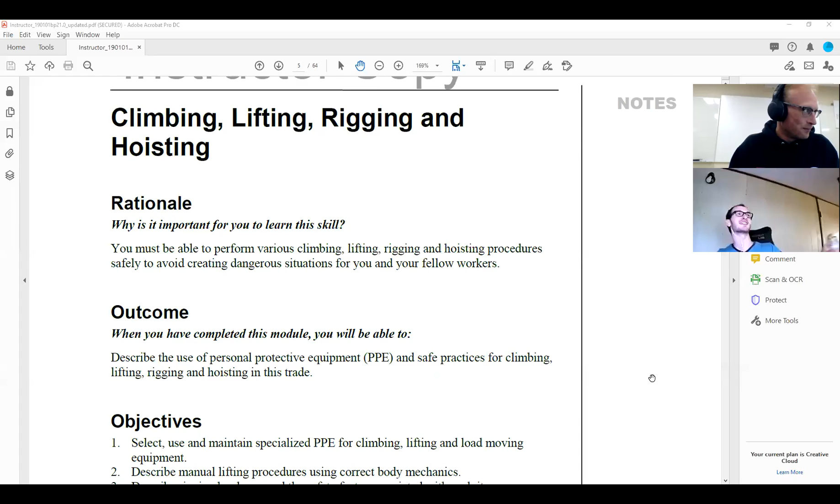At our shop where I work, we don't even have to wear masks at all. We did, however, lock the shop up from all drivers and whatnot getting in. Oh man, every shop should be like that anyway, as far as I'm concerned. Most of the time they're just a distraction to what's going on. So yeah, they just stand around for 45 minutes talking.

Yeah, exactly. So why do we need to know this? Because for some of you, you're going to be doing climbing. Most of you will be doing lifting and rigging and hoisting procedures. So some of you will be climbing wearing fall protection, but I guarantee almost all of you will be using a crane at some point, and I can promise you you'll all be lifting something at one point in the future. So how are we going to learn this?

Well, our 5 objectives in this ILM: select, use, and maintain, just like what we talked about in the last one, specialized PPE for climbing, lifting, and load moving equipment. So what are the different types of PPE we can use for that? Manual lifting procedures, so something that's often overlooked. We need to make sure that all of you are lifting properly, because I don't want any of you to have a sore back, that's no fun at all. For any of you who do have back injuries, it's not a fun time.

Describe rigging hardware and the safety factor associated with each item. So this is going to be when you start loading up, and especially this next one too, select correct equipment for rigging typical loads. If you're picking up small little parts around the shop usually it's not crucial, but once you start picking up these larger, really heavy, awkward loads, you need to be really, really sure that you're picking the correct load handling equipment.

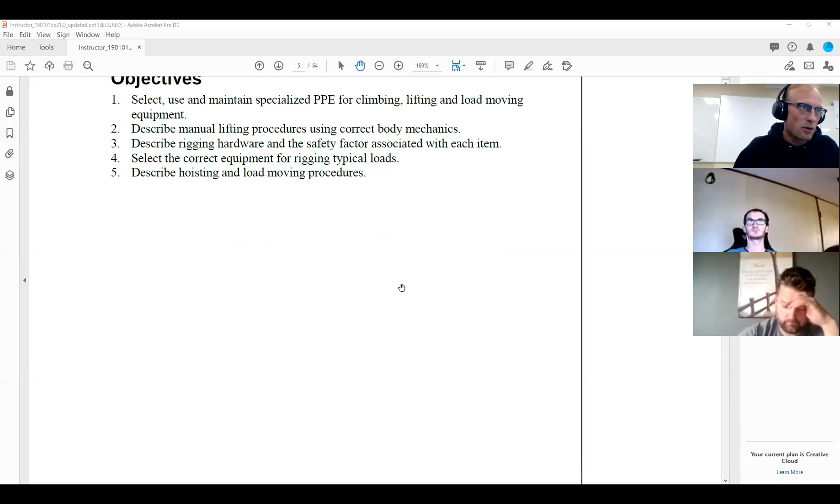We're going to talk about some crane sign language for those of you who have never used any of that. Sometimes places get loud and you're wearing hearing protection, so you can't hear everybody talking. You're not going to be able to see who's yelling now because we're all going to be wearing masks. So the sign language involved with cranes is going to be very important.

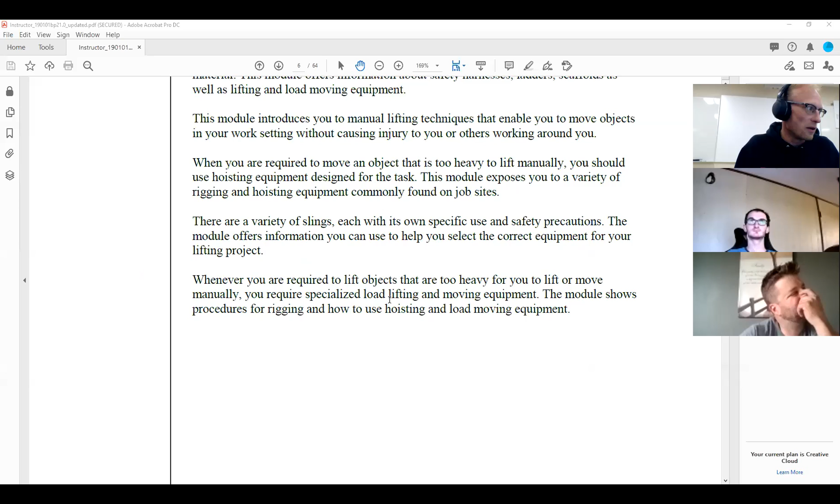What is the PPE we're going to require for climbing? Well, a harness, just like that one. Just like the one I have here. Just like something like this.

Wait, is my camera on? Can you guys see me? Okay, good. Yeah, you're good.

Just like this. This is the nub that hooks onto your back, so this is where your safety will be. This is going to go around your front area here. I'm not going to show you how to put this on. They give you some nice fancy directions in the ILMs there, but unless you're using this kind of stuff, it's not really necessary. That is something you'd certainly take a specialized training course for when it comes to PPE required for fall protection. They're going to tell you not only how to select the proper harness, the one that has the correct safety standards and fulfills all of those, but also how to inspect it and maintain it.

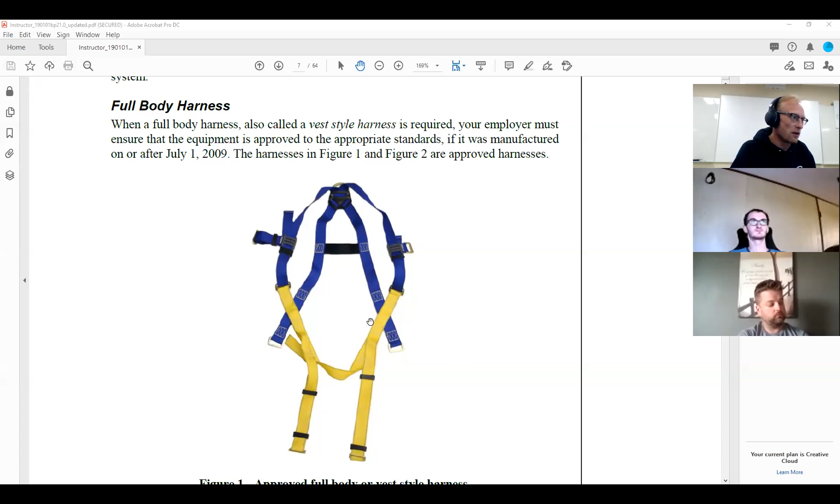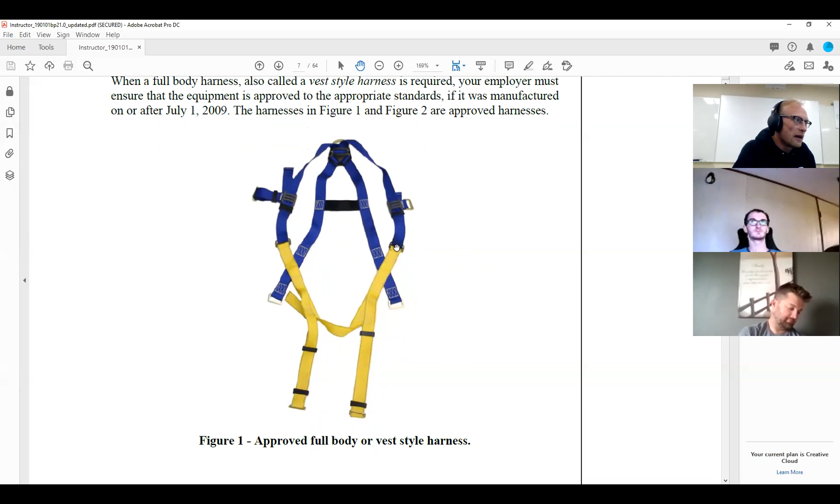Remember I said there's going to be some times where you definitely have to throw this out. For instance, if you don't have your own harness, if they're hanging along a wall and maybe they only get used once or twice a week, you need to inspect it every time you use it. But maybe throughout the week everybody wheels by here with a pallet of parts and they're rubbing along here, so now there's some wear happening in this area. Then you would need to be trained properly to know when to discard it and get a new one.

A couple different parts of the body harness: a front D-ring, this is the one I showed you here, and a rear D-ring. And here is where you would have what I call your lanyard and your shock absorber. This is what would actually extend. It works like a seat belt.

If it catches one fall, it's garbage. This whole assembly would get thrown away and you buy a new one. So that's what a fall arrest is. They don't just catch you. There's some give to that, some shock absorption, so that it's not such a jolt when you do get caught. That also means fall protection only works at certain heights. If you're only a foot off the ground, this isn't going to do anything because it's not going to extend enough, or it's going to extend too far and you're going to hit the ground anyway.

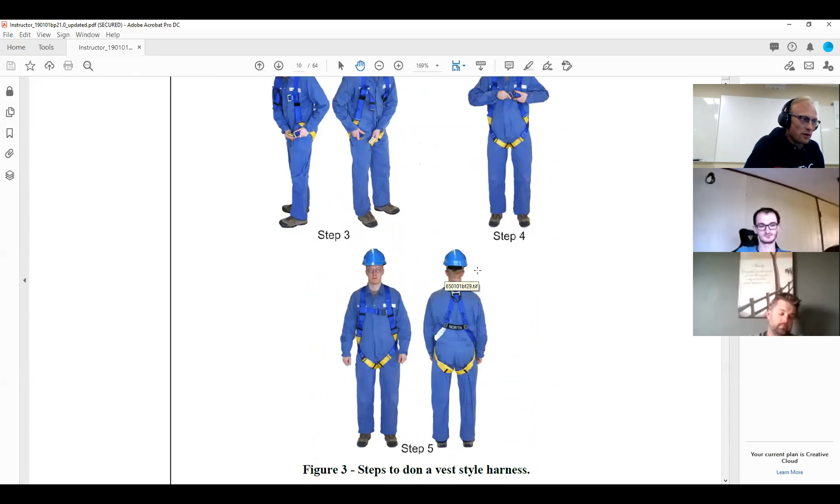And here's the steps on how to put this on. Yet again, if you need to wear this thing, you probably already know how to put it on, so I'm not going to go over it with you. And if you don't need to wear it, you've never been trained on it, you don't know how.

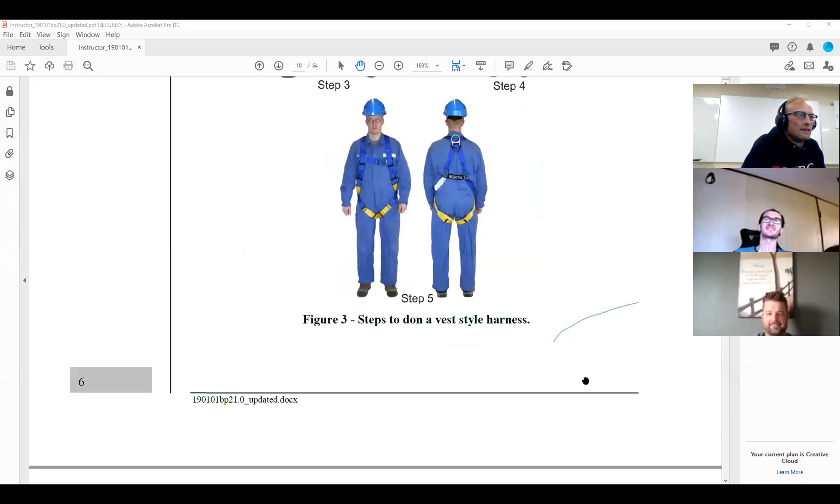Hey, someone's drawing on my screen. Guess somebody found that option. Yeah, there it is. It's okay, I can erase that too.

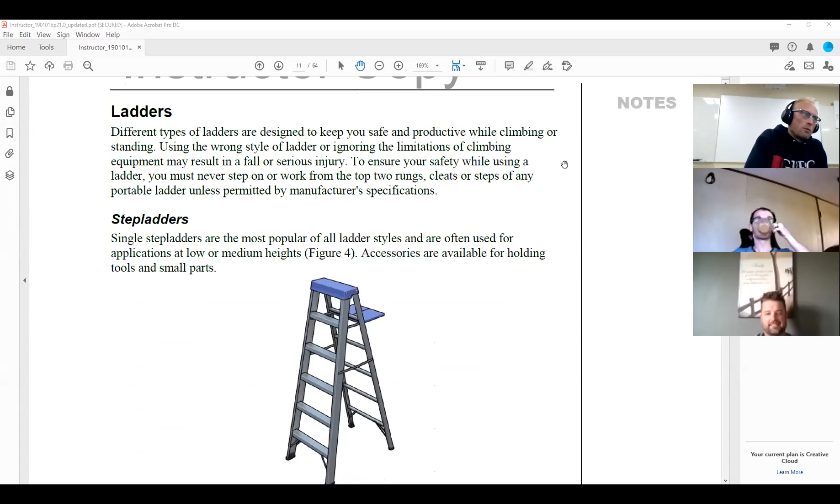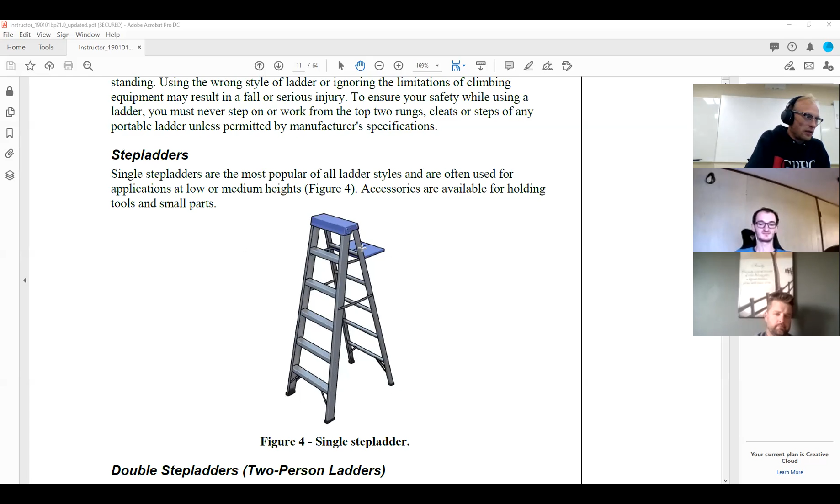So ladders, this is probably something all of you have used at one time or another, right? You've got to get up onto the back of a tractor, so you put a ladder like this over top, one on one frame rail and one leg on the other frame rail, and then you ratchet strap it down to the frame rails, right? Hopefully not, that's not what you're doing. But ladders are something very common in a shop. Step ladders, just to get up onto short little heights, and you can get these that are pretty tall, like 15 feet high step ladders, pretty easily.

One that'll have a ladder on both sides. This one only has a ladder on one side. I'm sure we all know we can't climb up the other side of the ladder.

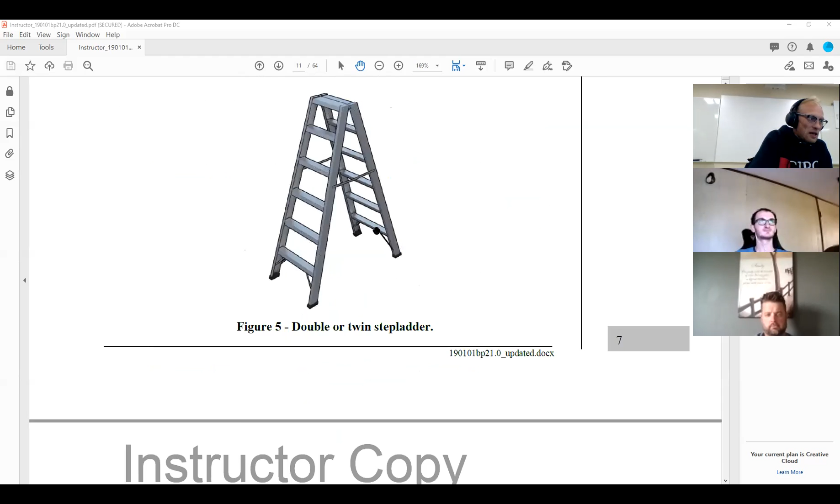The extension ladders need to be correctly chosen. OH&S, like in everything else, explains how ladders are correctly to be used. There is a correct amount of overhang that your ladder should have, depending on the height you're going on.

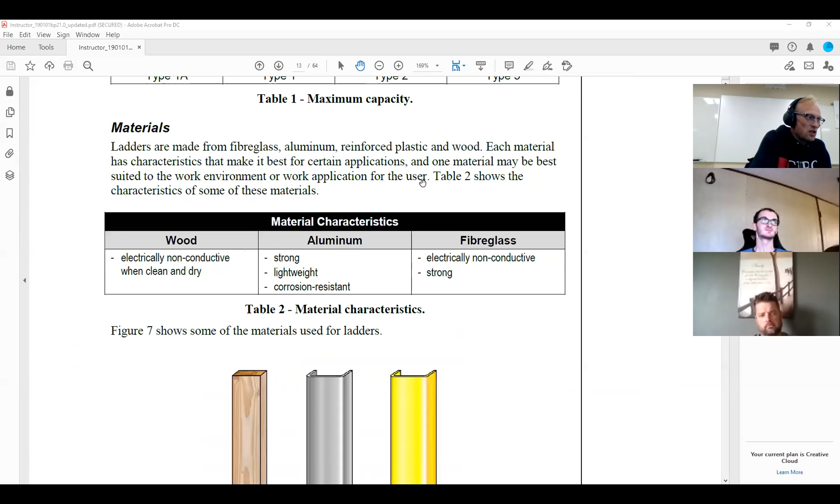For me, my strongest recommendation for the workplaces I was at is if you need to go onto the top of a van trailer, the best way to do it is with a scissor lift.

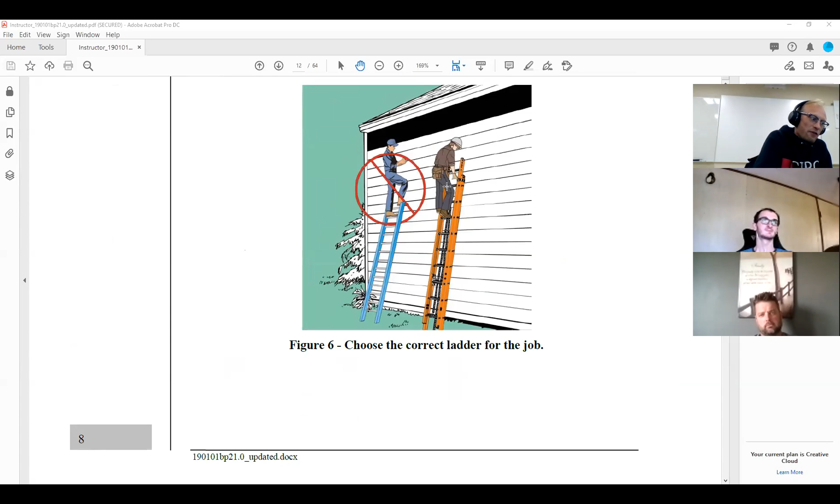It's much more efficient. We used to change a lot of rollover tarps. It's essentially a van trailer with no top, but it has a tarp that rolls over the entire length of the trailer.

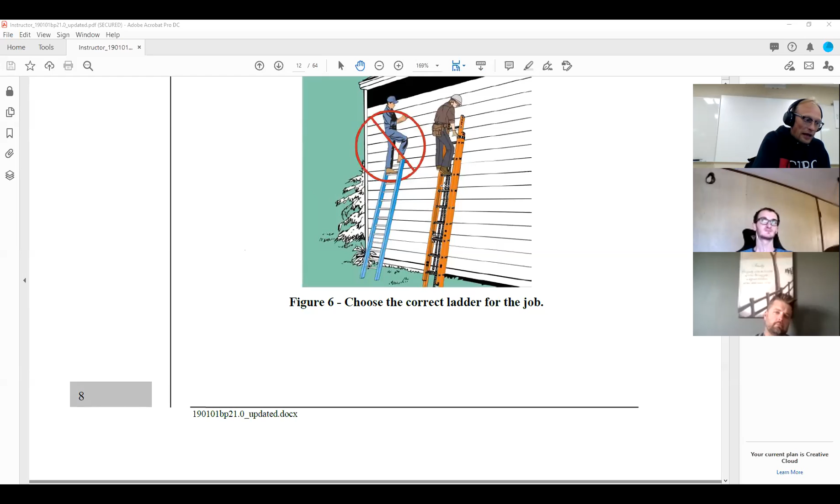At first, we were doing it with ladders. We would have 2 ladders, and you'd have to haul the tarp on your shoulder up a ladder and then put it on the roof of the trailer. Needless to say, that was a little bit hazardous. It actually took a lot of time. It was not easy to do.

A lot of setup. Took 2 guys to do it, and you had to have 2 certain people. If you weren't strong enough, or if you weren't confident enough to go on the ladder with this 30-foot tarp, or one end of it on your shoulder, then you couldn't do it. And it wasn't something that I would make anybody do.

But once we got a scissor lift or man lift, it was one that had an overhang, so we could hang it over the end of the trailer. It had enough capacity that it could lift up the tarp itself, and it made an hour-long 2-person job take about 5-10 minutes for 1 person.

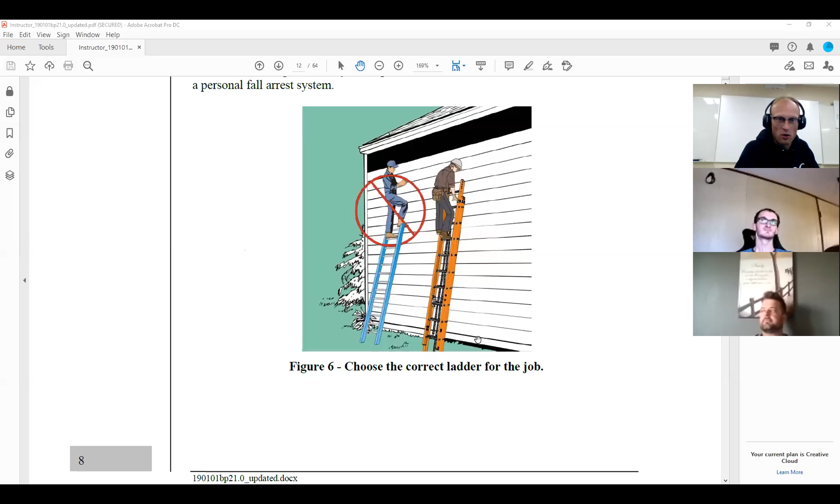So much easier, much safer, and essentially if you're doing a lot of this job, you're saving a lot of time, so you're going to pay for that piece of equipment. I realize equipment is expensive, but this is one of your employer's responsibilities: to make sure you have the proper equipment to do the job as safely as possible.

Materials. Fiberglass has become a very popular standard for its non-conductiveness. It is strong. Most of them are as strong as, or can be rated as strong as, aluminum ones. They're lightweight, but they don't conduct.

And so these are mostly the standard. You'll still see a lot of aluminum ones. For our industry, we don't need to worry about electrical as much. I'll show you a few places where sometimes you do have to worry about electricity in our industry, especially with aluminum ladders. Wooden ladders — does anybody out there have a shop where you have a wooden ladder?

I don't hear anything, so I really hope that no one has any wooden ladders out there anymore. Oh, just aluminum, okay good. I have had one student tell me that they had wood ladders. I would recommend replacing it if that is what you do have.

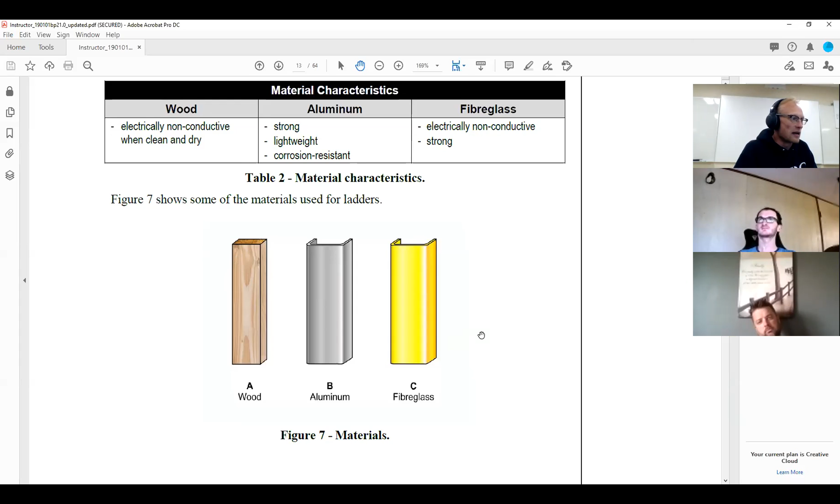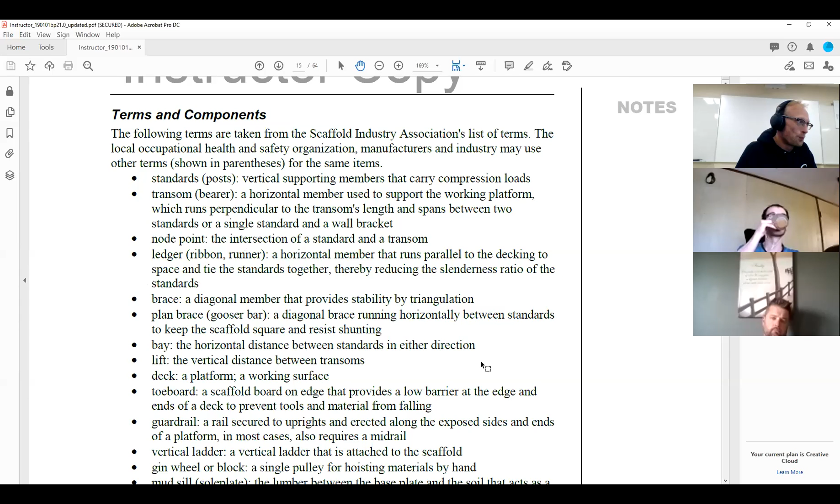So, scaffolding — does anybody use scaffolding? You guys setting up scaffolding? Yes, you are. For tank inspections. Okay, makes sense, absolutely. So there's a few different kinds of scaffolding.

There's going to be a permanent type, or this type here. This is going to be more construction-style. So this is what I was looking for a bit — are you setting this type of scaffolding up around your tanks?

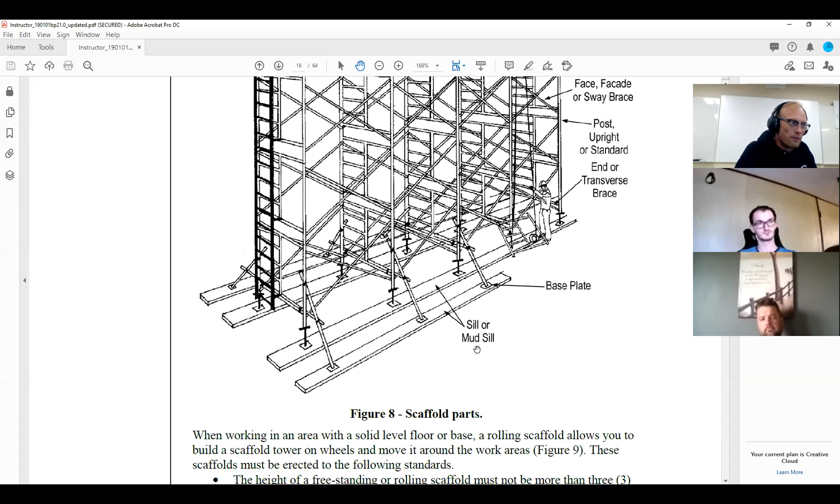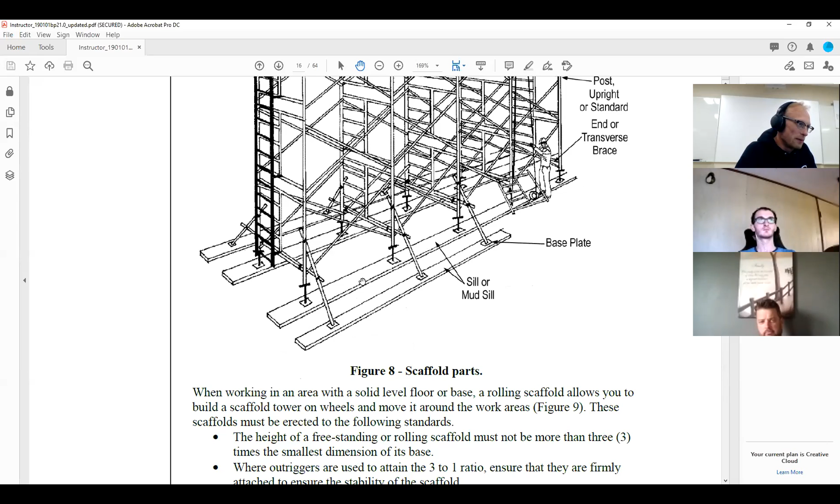Okay, and you would have all of this, like this would probably be outside then, and you have all of this set up on the scaffolding as well? Or do you — not really.

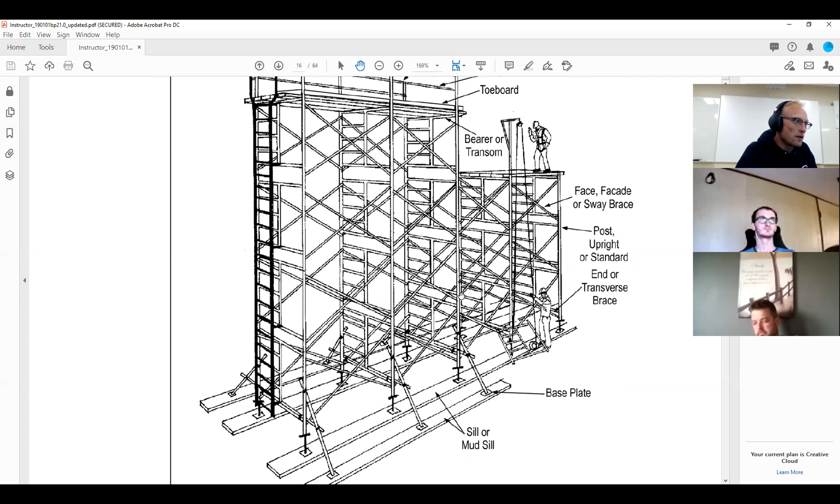Yeah, this — okay, so the difference is, all of this scaffolding is essentially modular. You can build it as high as you want, as low as you want. You can put more sections up higher and higher, and that's where all of this terminology comes in. A lot of it goes with the different pieces that come with the modular one, where you can assemble and disassemble it all the time.

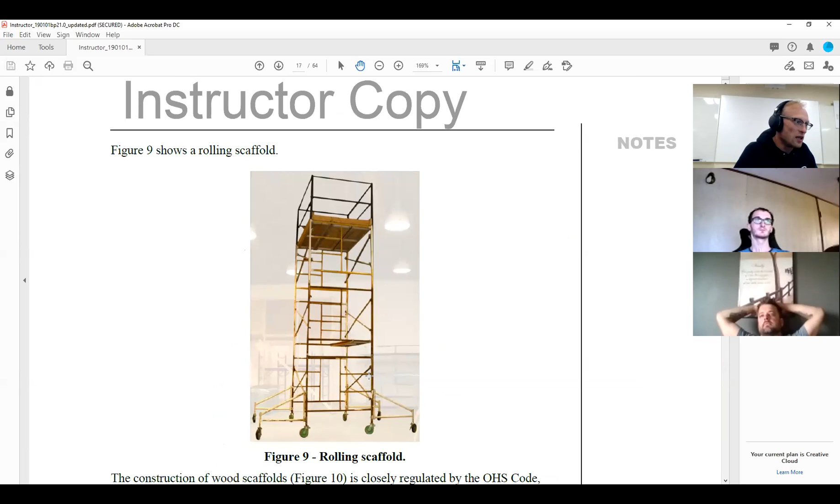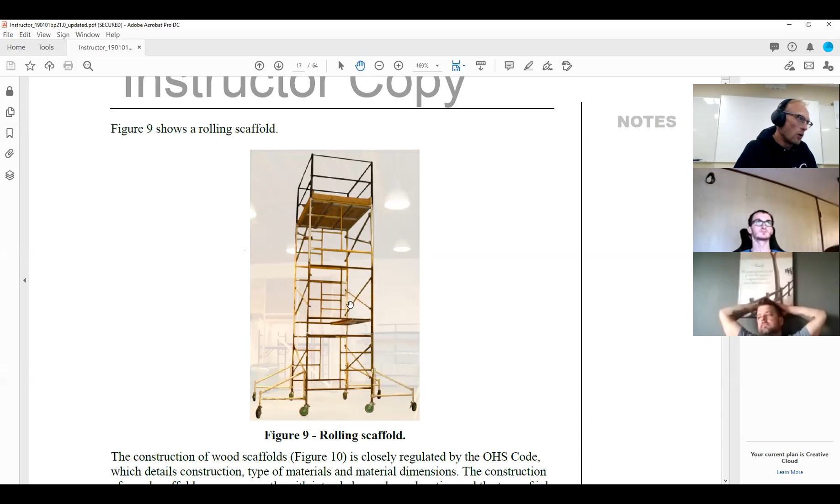This scaffolding, you use it inside, I'm guessing, Ali? Yep, this is only inside. This is what you'd set up outside at a construction site. This is what you guys are going to use. The large majority of you will be using something like this. You wheel it out to where you need it in the shop, put these outriggers out, and then you can go up and down it using your fall arrest as needed.

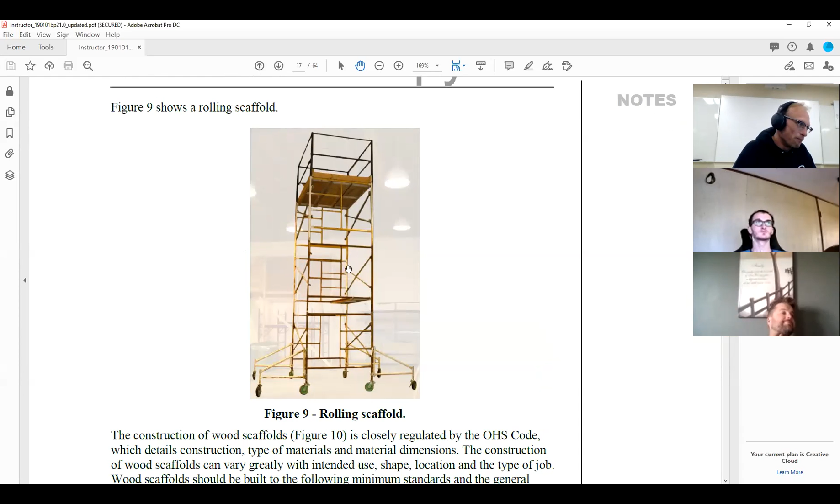So for tank inspections, absolutely. You're talking about doing the VK inspections and stuff like that, right? You bet. Yeah, absolutely. We had, they call it a stairway to heaven - it's just a staircase on wheels. Very similar to this. We used that when we were doing VKs and stuff like that.

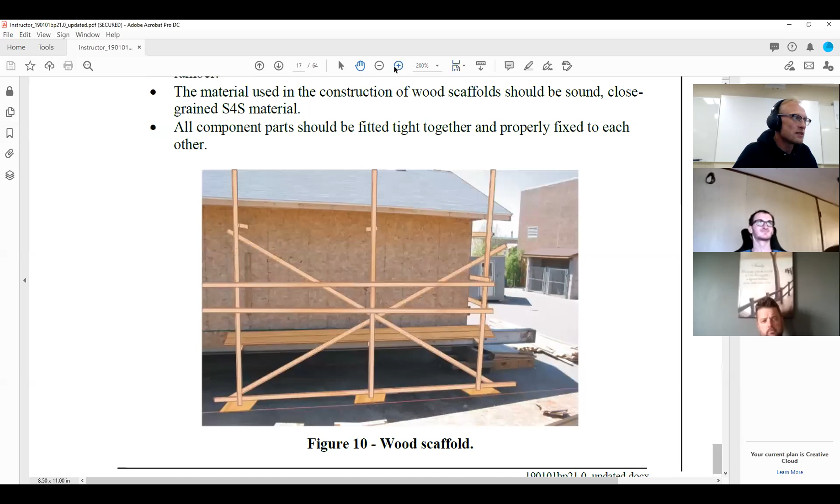Then they have, I don't know if you can tell, but this is a fake picture, an obviously fake one. So this wood isn't real in here, it's drawn in after. Hopefully none of you have to set up wood scaffolding like this. Most of us aren't going to be building sheds, doing other jobs. So just so you know, it does exist though.

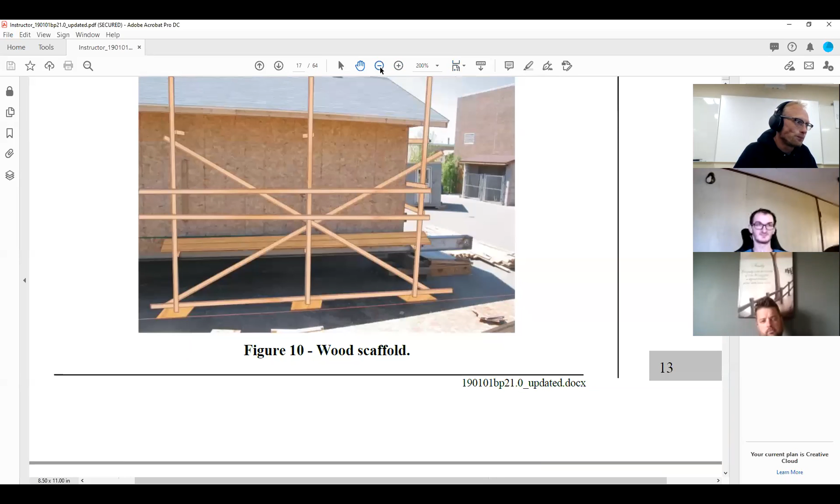Here we go, the important stuff. This is what we really got to get into - lifting and load moving equipment. So what do we need to consider in our hazard assessment while we're doing this? Well, the weight of the load, the size and the shape, and the number of times we'll need to move it, and the technique used to move the load.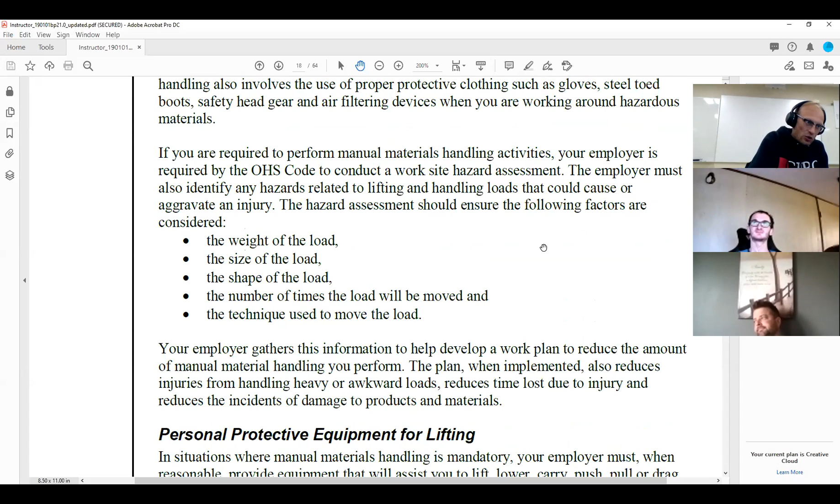So if your job is to move brake drums from the back of a flat deck to the scrap bin, and you have 10,000 brake drums to move, I would highly recommend that your technique isn't manually moving it - use a machine, because you're going to get tired. There's no way you're going to be able to do that job all day long. Heavy or awkward loads all day, you're going to get injured. Eventually you will. And I mean, productivity too - how many hours can you haul brake drums all day long if you thought about it?

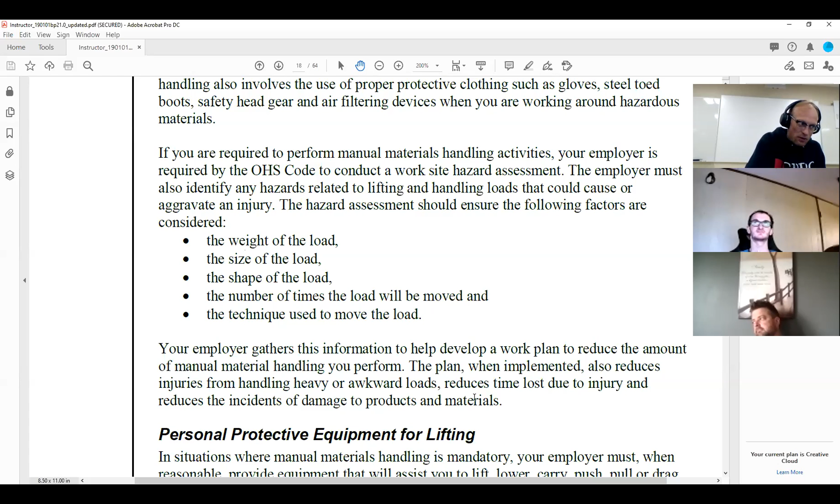Now, when you do have to pick up something manually, they need to provide you with equipment to assist lifting, lowering, carrying, pushing, pulling, and dragging. They're required to ensure you're trained in the safe operation of the equipment. So if they have skid steers, pickers, telehandlers, even pallet jacks, come-alongs - all of these things are different types of load material or load handling equipment that you need to know how to use before you can use it properly.

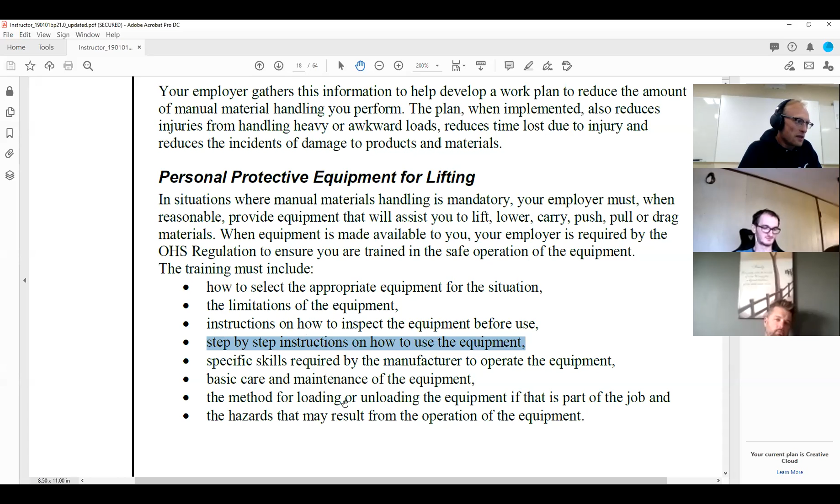All of that equipment is going to have a daily inspection, and you're going to have to fill that inspection out before you use the equipment, or make sure it has been done already that day. You don't want to be like that gentleman who didn't know you couldn't drive a forklift when you're not in it. So you need step-by-step instructions on how to use the equipment. You don't want to have to try and figure out where the brake pedal is when you're going gung-ho to a wall already, okay? And then the basic care and maintenance, methods for loading and unloading, and what would happen if you didn't operate it correctly. Very important.

So some of our material handling stuff, an outdoor forklift and an indoor forklift - it tells you what is the difference between these. Why is one outdoor and why is one indoor? One is tires. The tires - I heard someone say something else, but someone said the tires, and that's what it is. These solid tires are unforgiving. Neither of these forklifts have much of anything for suspension, and there's a reason for that.

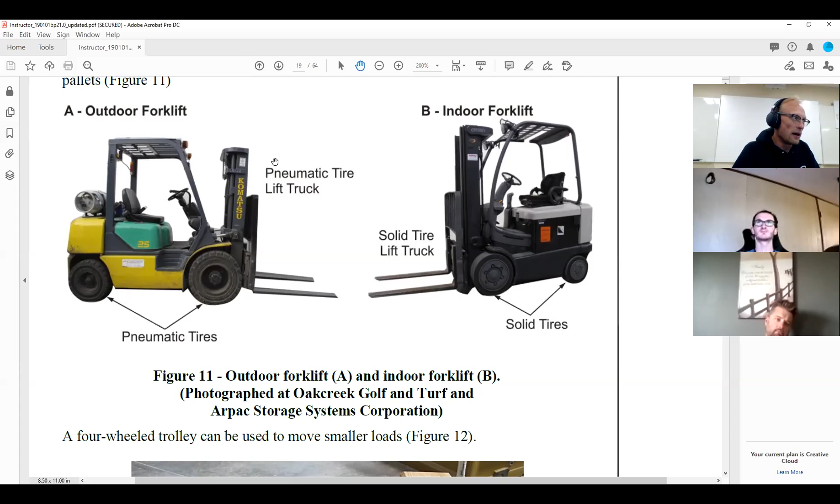I'd imagine that either of these forklifts could probably go up 30 feet, maybe even higher. They probably can lift 1,000 pounds, if not more. When you have this all the way extended, all the way up, the boom's all the way up there with a load, and you're pulling out, you don't want this to be rocking and tilting. If you had a really nice loose air suspension on this, air ride, these would shift back and forth all the time, and that load way up top there would be swaying so far back and forth that you'd risk shifting your center of gravity too far and dumping this thing over. So they already have almost no suspension travel, so now the tires become the suspension. This is the only way you don't feel every single little rock in the yard, is with the pneumatic tires.

For any of you who have ever taken a solid tire unit out into a gravel yard, holy crap, keep your tongue in your mouth because otherwise you'll bite it off. It's really, really bumpy. The shop I used to work at, their forklifts had all the tires filled with solid stuff instead of air. Oh yeah, so you lost any suspension absorption with that right away. Yeah, there's also other things you can use.

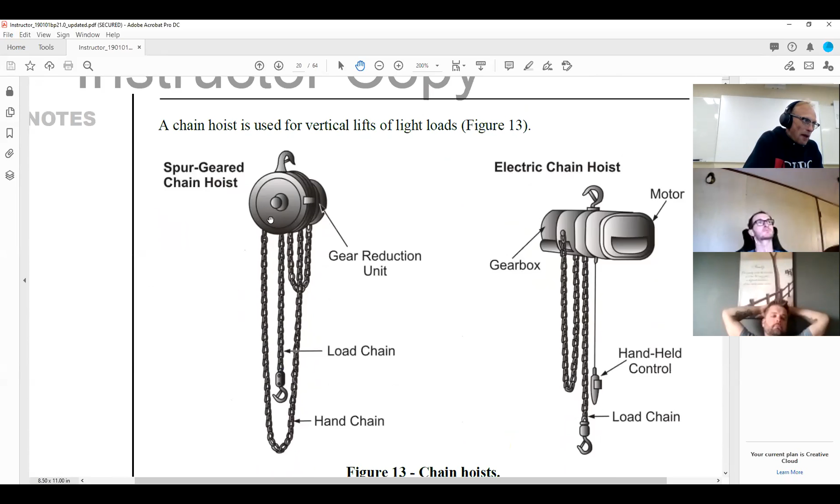Hey, if you gotta go get parts, get a parts trolley. Nothing wrong with that. Some of the other different things you can use: a manual chain hoist, an electric chain hoist, they'll lift things up nice and easily.

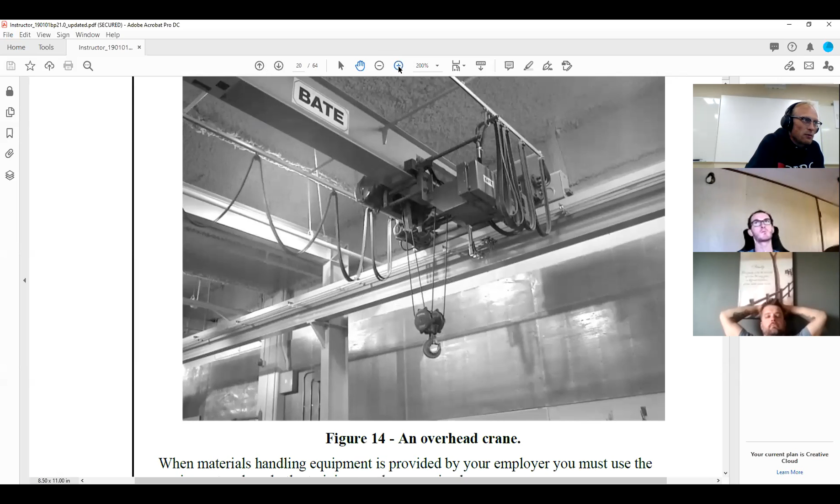Does anybody not have an overhead crane or any kind of crane? All we have is a manual hoist. At least it's something. Do you have pits at your shop? No pits? I have a pit and a 5-ton crane. That's the best combination I've found, to have a pit and a crane. It's pretty nice.

So I talked about that there is one important thing when it came to electricity. A lot of times when you're worried about ladders with electricity, you're worried about overhead power lines, right? Those typically aren't in the shop unless we have an overhead crane.

So what we have, they are right here, along here. Can everyone see these bars? There's 3 of them. And this picture isn't color. I wish it was, but it is not.

Do you guys see my notifications when they come up too? Like, did you just see the email I got? Nope. No? Okay. I never know what it shows or what it doesn't show yet. I'm still getting used to all this.

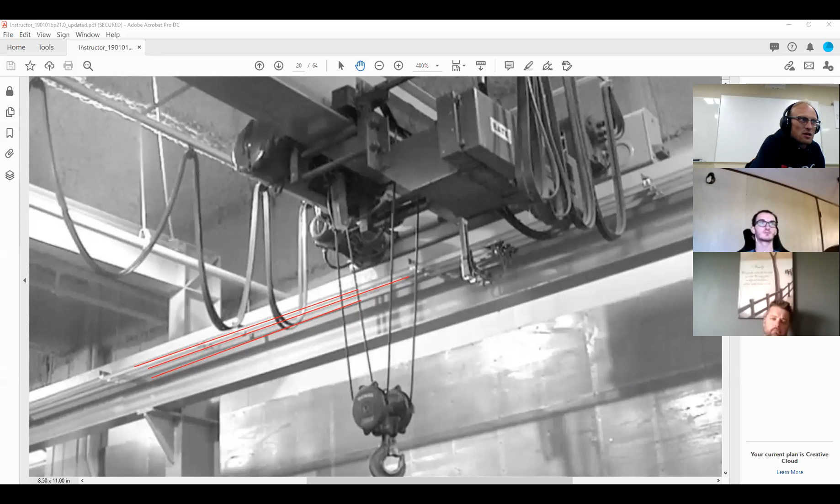So anyhow, regardless, those 3 bars there, those are what conduct the electricity. So right here, this piece here is like a slider, and these little contacts here slide along these bars, and that's how this gets energy, how it gets electricity. That's how this all gets juice.

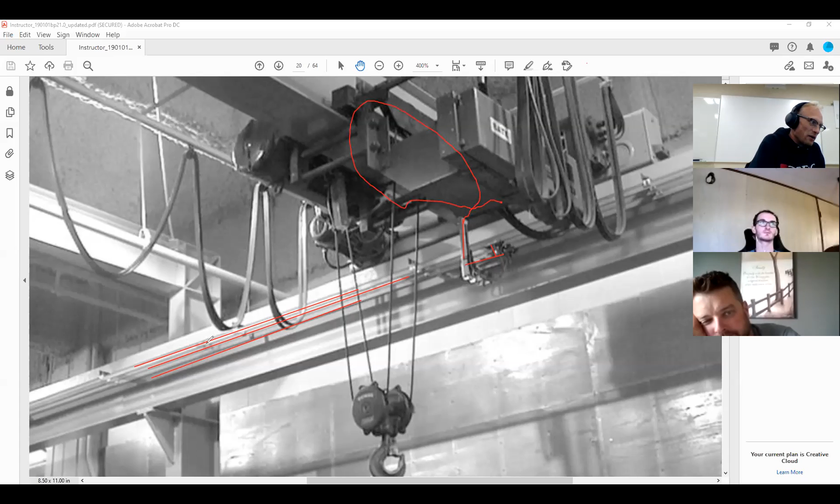Now, if you lean your ladder up against these bars, you're gonna have a very bad day. Next time you go to a place that has an overhead crane, or we can take a look at one, we don't have an example in our shop. Our shop's wiring is all contained, but large gantry cranes like this will have those exposed bars. You have to be very, very careful.

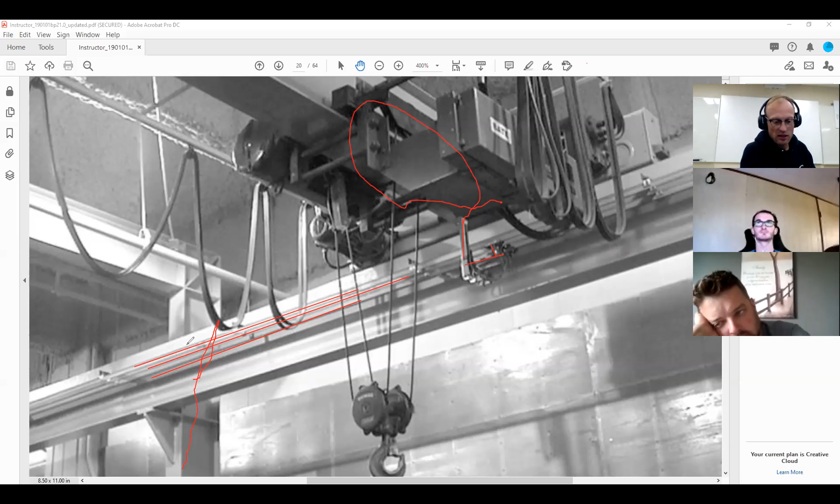They're usually like 2 inches thick by a 1/4 inch thick of copper. If you didn't know what they were, there's no warning on them or anything. If you happen to be up next to them, even in a telehandler, and you put your hand on there, you would be dead. It's 3-phase power, it will kill you very fast, very, very fast. So that is my big warning for cranes and overhead power lines in the shop.

So an aluminum ladder leaning up against there, you'd know right away that you're having a bad day because there'd be lots of sparks flying and everything. So just keep that in mind.

When it comes to overhead cranes, yet again, if you have any type of crane in the shop, you're going to have training on it, and they will certainly talk about those exposed power bars. They didn't talk about the exposed power bars for us. Really? Weird. Well, ours were mainly sealed in, the cables were running through tubes. Oh, perfect. And that's similar to what we have in our shop here. So they might just not have mentioned it because theirs was a bit different. I worked at a place that had essentially this identical setup.

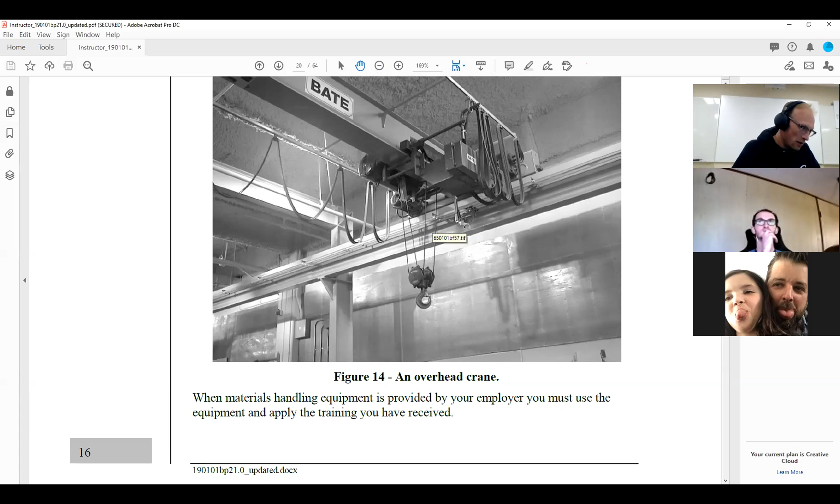If this was a color picture, you'd see those bars are copper, bright and shiny, because this scrubs them clean all the time, constantly wiping them down. You could see that they're copper, and they definitely had to be careful of them. Ours were orange and green. Nice, at least the color that you can see.

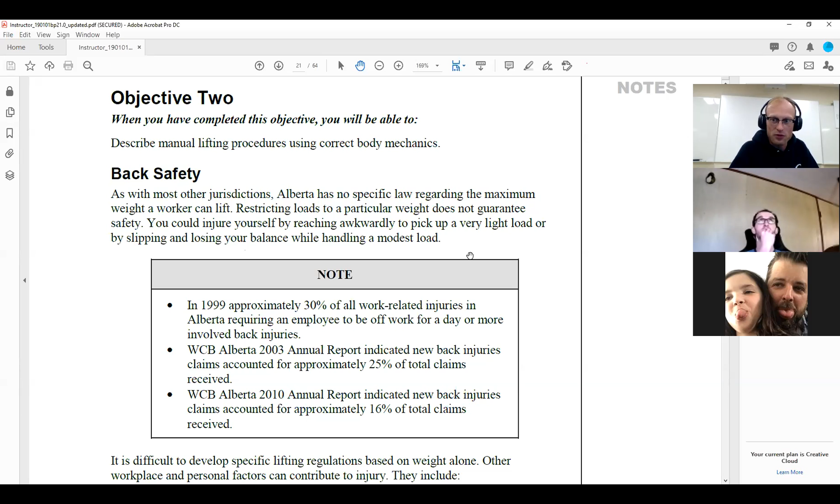If you were working in the last stage, because I was working at a tank shop over in Hythe, and they build them standing up, so if you're in the last stage, you're pretty high up there working. Yeah, it would depend on what you're doing. If that's what you're doing at that place, you could start getting pretty close to them by the time you get up to the top.

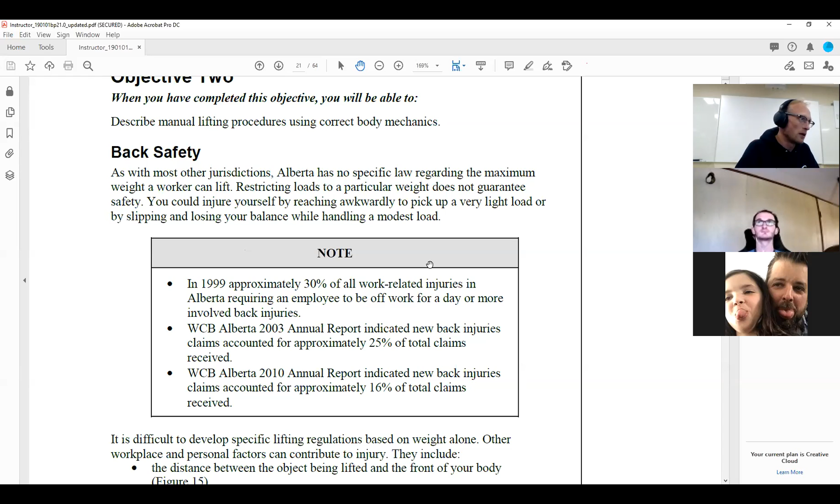So it's always good to know what's out there that can kill you. Obviously, that's what this safety section is about, right? Back safety.

About 20 years ago, approximately 30% of all work-related injuries in Alberta requiring the employee to be off work for a day or more involved a back injury. In 2003, the annual report indicated new back injury claims accounted for 25% of total claims. And in 2010, an annual report indicated new back injury claims accounted for 16%.

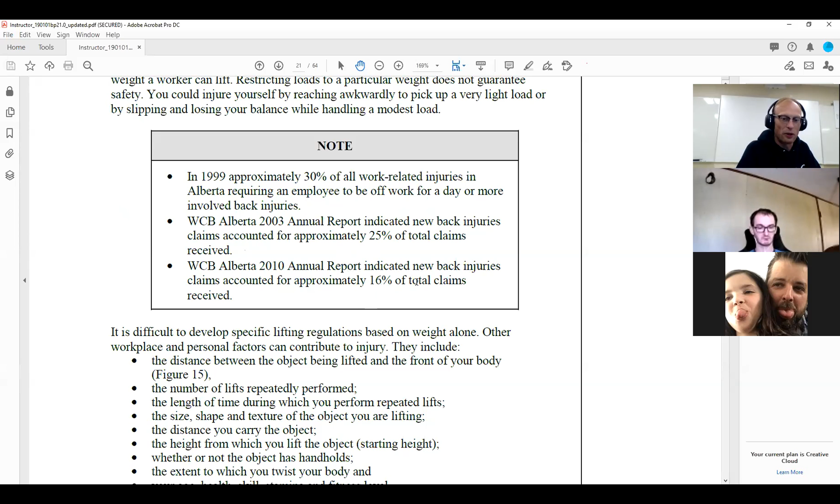So we're getting lots better. I think that means the message is getting across, the message about lifting up and carrying things properly.

This is something that's often overlooked because we're in a hurry, we're rushing, we pick up very heavy things, and a lot of times maybe we shouldn't. Like I said, there is no maximum amount. OH&S doesn't say you're only allowed to lift 75 pounds, you're only allowed to lift 100. There isn't an amount like that.

So it's up to you to know if you can or can't lift it, or if you should be looking for a crane or a hoist or something else to lift it with. So what can your employer do? This is the type of thing where maybe they can make it so you don't have to lift whatever you're lifting, change what it is you're lifting, change where you're storing things. So maybe instead of storing the brake drums on the 5th floor, you can store them on the 1st floor. I don't know, just an extreme example.

Maybe using some equipment or reducing distance. You have to move this object away. If you only ever do brakes in bay 10, but you keep all the brake parts on the opposite end of the shop, on the opposite end of the warehouse, maybe you should consider moving some of those things. Clearance and headroom in their working areas, so that's just engineering.

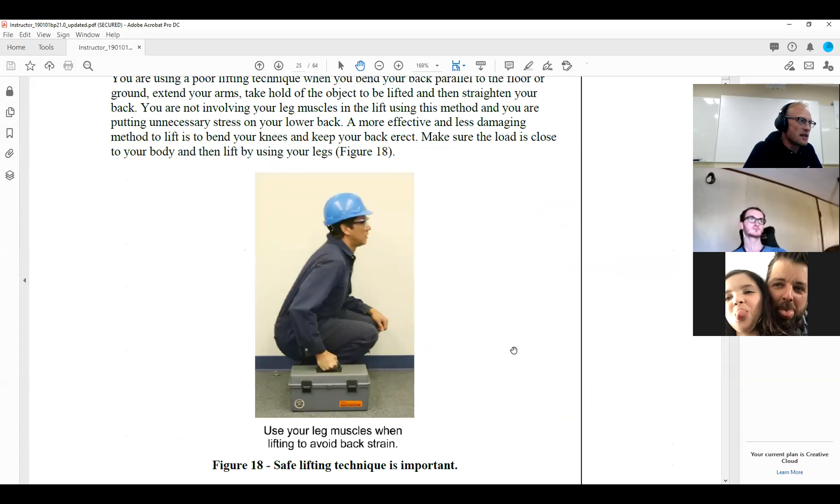Safe lifting technique - I'm sure all of you have heard this a million times before. Use your leg muscles when lifting to avoid back strain. That is always, always what you're told to do. Lift with your legs, not with your back.

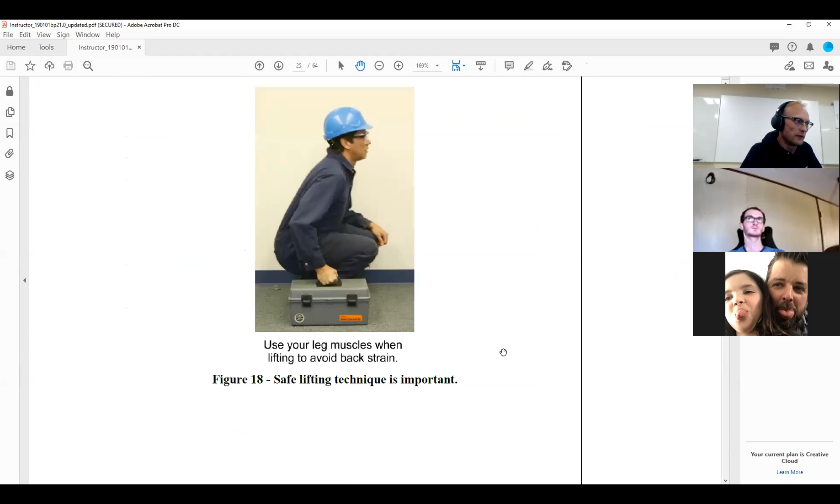Never pivot straight over at your hips - that is a way to hurt yourself very easily. What they're showing this lady doing is twisting around, so you don't want to do that. You want to always stay completely square to your load, meaning your load is in front of you and your feet are pointed in front of you.

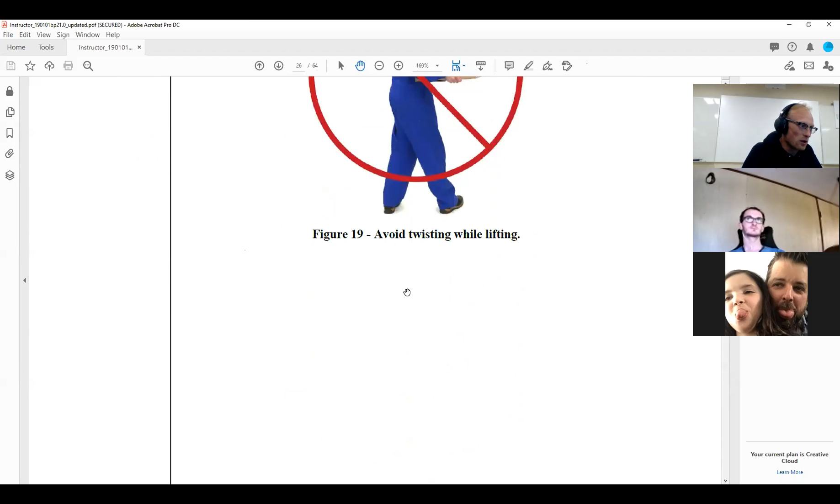How should you put something down? Bend at the knees. Notice how she's not just pivoting straight forward over.

I feel almost bad - I used to, in class, give a demonstration. So I'll show you how to not pick up, like this - don't bend over just like this. See, don't just bend straight over and pick something up. You have to bend with your knees. Oh man, this is probably the silliest I feel doing anything so far today.

So bend over, not like this. Don't pick up with your back. If you need to pick something up, bend with your knees, just like that.

All right. Oh no, and Clint saw me do that, didn't he? Crap, I didn't notice you sneak back into the room.

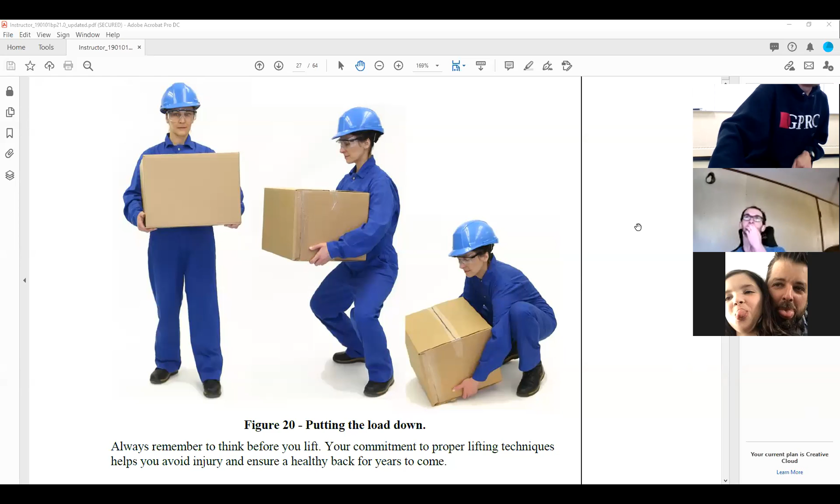So always, always for up and down, bend at your knees. Very important.

Rigging hardware and the safety factor associated with each item. So a few important things about rigging hardware - when you're hooking up a load, you want to make sure that it is rated for the proper weights. That is probably the most important thing.

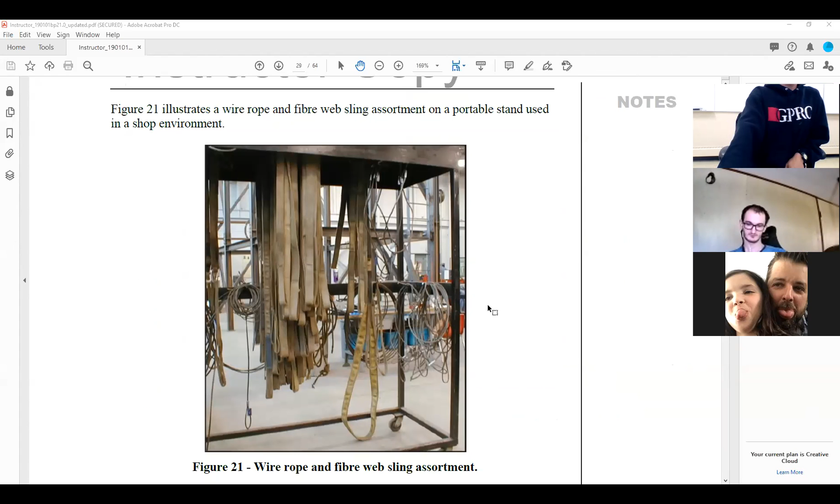Does anybody have a nice rack that looks like this at their workplace, of all the chains and slings and all that good stuff? They're all just hung over on the wall at our shop. Are you able to keep yours pretty neat though? Nice. Yeah, it's all right. Yeah, ours is in a drawer. In a drawer, under the rig-up shed.

You want to keep these stored neatly and nicely because if they get damaged and worn, you have to get rid of them, and you don't want the equipment you're relying on to lift heavy loads to be damaged. That is not how you want them to be stored. It's just like your climbing harness - if you start having these thrown on the ground or just on a workbench all over the place, they start getting abrasive damage on them. The wire slings start getting kinks in them, your chains start getting dented or stretched or damaged. They're all going to have to be replaced.

Is anyone using wire rope slings still? Not in the shop. About the only thing we use them for is to hold down tarps on the trailers. Yeah, that's about it.

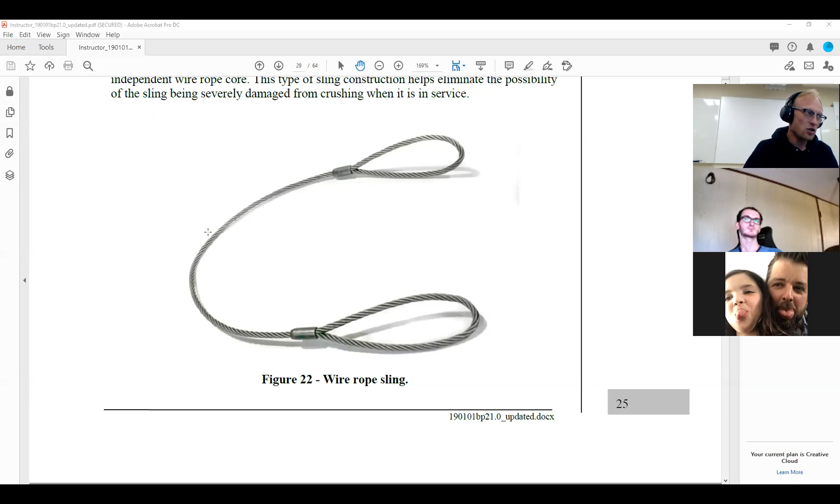Yeah, they still manufacture slings just like this one for lifting purposes. In our industry, we've gone away from this for a few reasons - they're susceptible to damage, they're easily shock loaded. If they accidentally become shock loaded, they will bird cage out and never return back to their proper formation, and then they're garbage. They're also easily kinked and damaged - up here, if you look close, you might even see one that is that way, but if it gets a kink in here, it's garbage as well. Can't be used anymore.

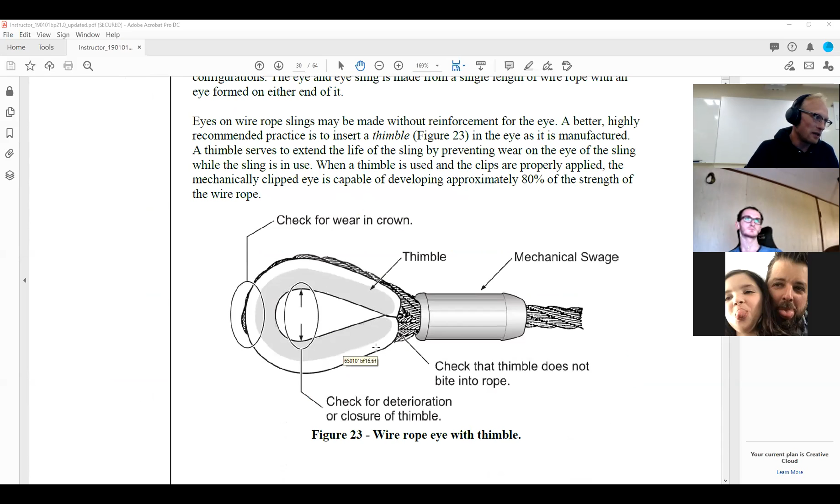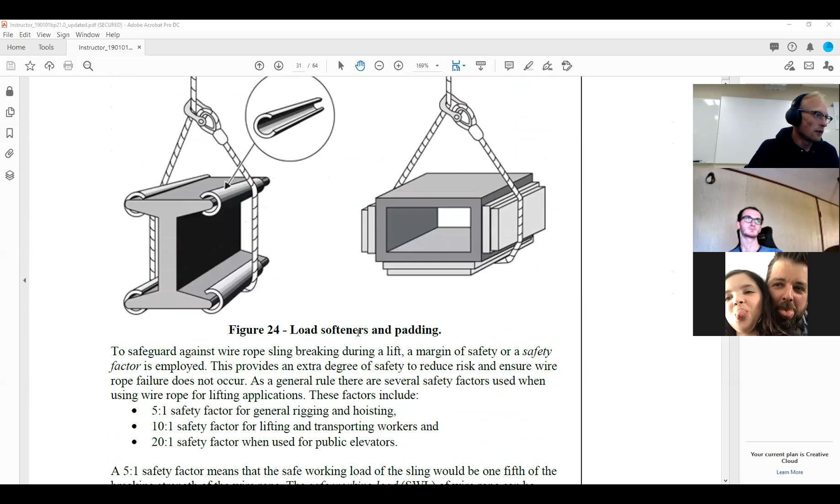The thimble ends - a wire rope with an eye that has a thimble like this - these get damaged and worn easily. They can become crushed. A lot of times we've gone away from those and gone to fabric slings, is what we've essentially gone to.

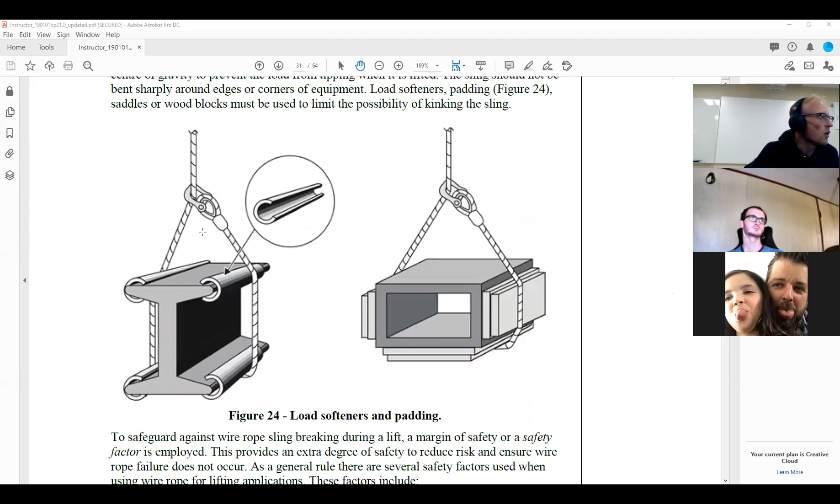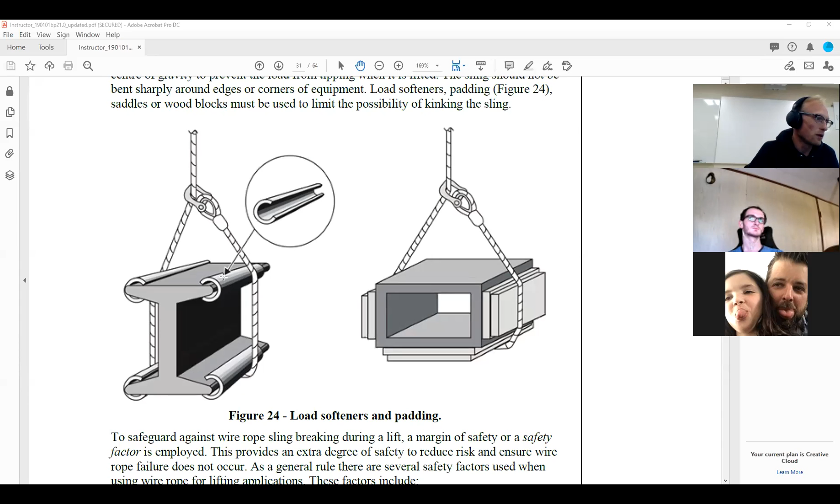So a sling just like this one can be used in these situations. This looks like it's a wire rope - yeah, in this picture it is a wire rope. You would want to put some sort of load softeners and padding, even if you're using a fiber sling, because these sharp edges and sharp corners, especially on this wire rope, can cause the kink in the wire sling.

So wire rope, the one place it will always be used is right here in elevators. In a public elevator, they still use wire cables to haul them up. It's a 20-to-1 safety factor, meaning if this elevator is designed to carry - I'll just use an easy number - 100 pounds, my elevator is only ever going to carry 100 pounds, but I need a steel cable for it, and it has to have a safety factor of 20-to-1.

So that means the breaking point of my wire cable has to be 2,000 pounds if I intend to lift a load of 100 pounds. That's how the 20-to-1 safety factor works. So for general rigging, if I wanted to lift something that weighed 100 pounds, does anyone want to guess how much the breaking limit on my safety factor would be? 500? Yeah, it would be 500 - 100 pounds times 5 equals 500 pounds. That's how the safety factor works, essentially it's multiplied by it.

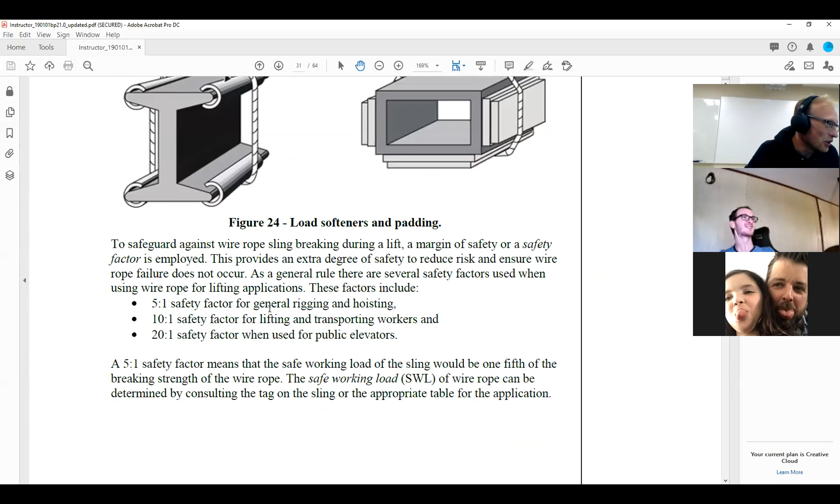For some reason I thought you pointed at the middle one there. Oh yeah, my mistake, all good. 5-to-1 is what I was talking about. As long as you know now, it's multiplied by what it is, and that's what that ratio means. I'd be willing to bet this is what the large majority of you are using in your shop.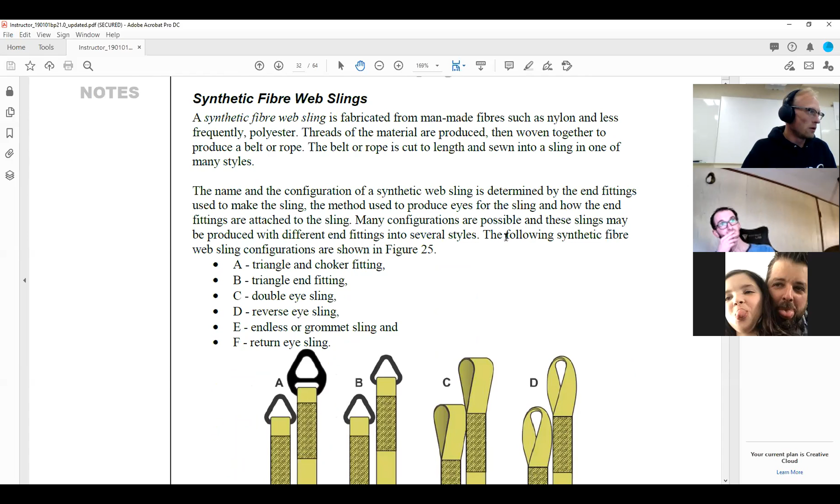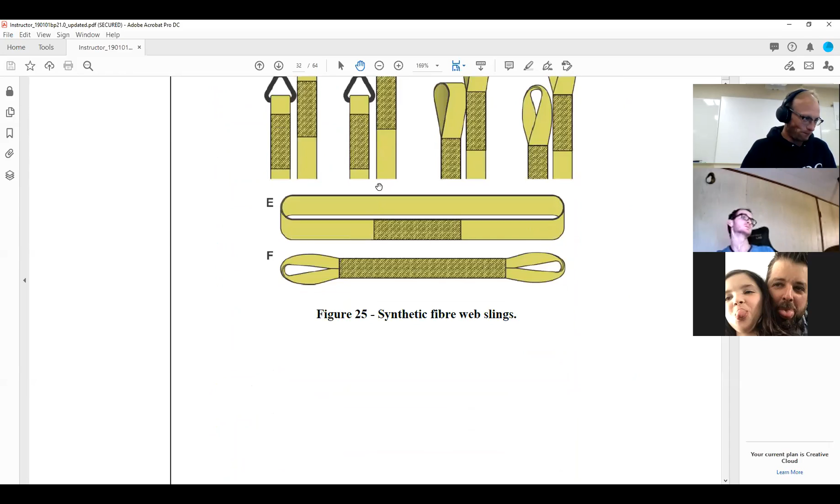Different types of synthetic fiber web slings. They're versatile, they come in all different types of configurations, making it easy for rigging up. Different types, all these different kinds. They're not as susceptible to shock loading, and they don't kink. So if I bent this in half and drove over it with a truck, it would still be fine as long as it wasn't torn or ripped.

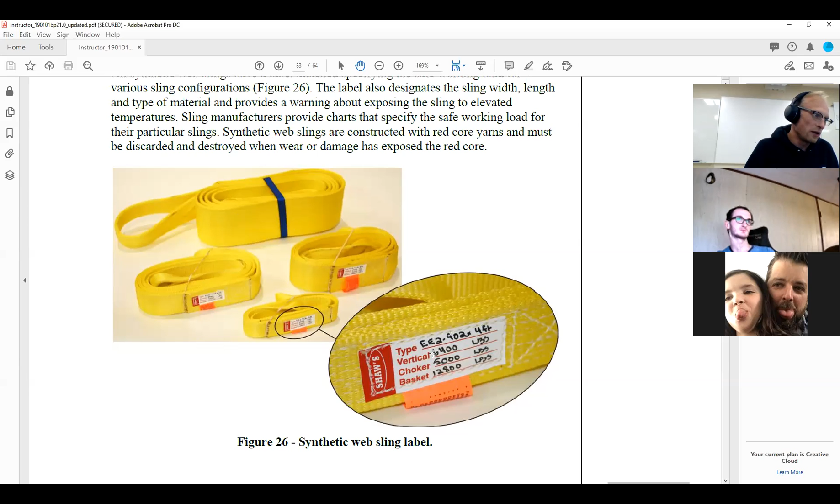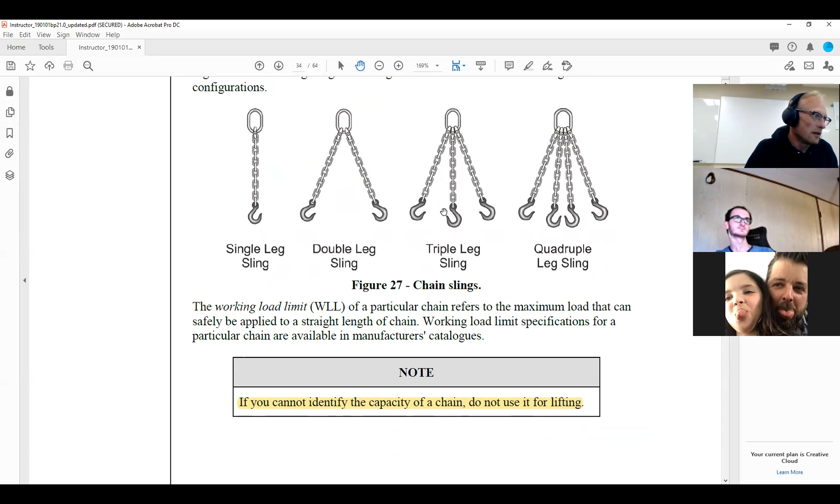They can be used in any sort of configuration as long as it's on the label. We'll talk about these 3 different configurations a little bit too. This label has to be on your synthetic sling - that's how you can tell what the weight rating is essentially. Without this, you have no idea what it's rated for. Same thing goes for your wire sling, wire rope sling - it has to have a weight rating as well. Same thing with a chain - a proper chain for lifting has to have a tag on it that says who manufactured this sling and how much weight it can hold in its different configurations.

All of these will be based on manufacturers, so the actual manufacturers have to post them out there. So that being said, is it okay to grab any old chain and use it for lifting a load on a crane? Definitely not. Absolutely not. OH&S will be very upset with you if you decided to do that. Chain slings have to be specifically purchased for lifting.

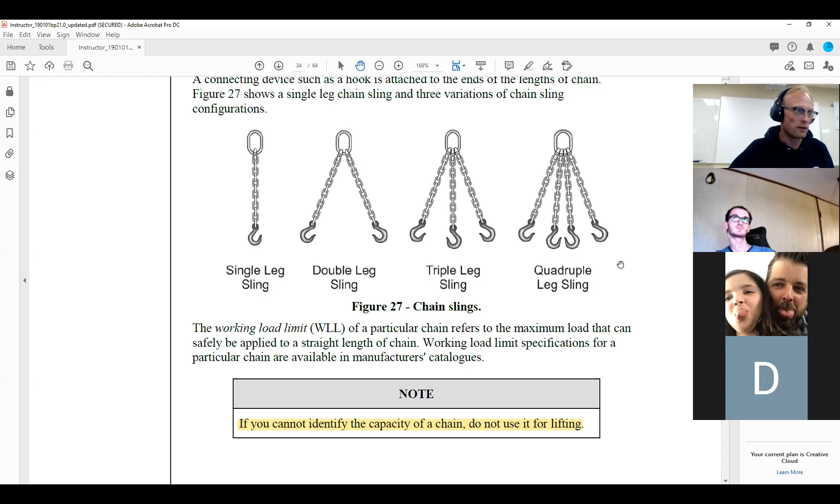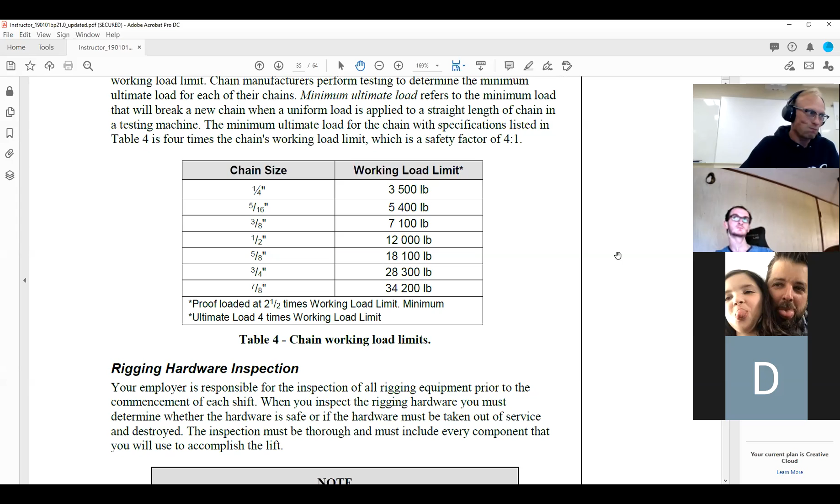I work for an oil field hauling company, so we run 45-ton cranes, a 150-ton crane we just bought, and a 250-ton crane. We used to get all our chains pull tested every single year, and then we found out we don't have to do that anymore - it's a visual inspection now. But it didn't ever hurt to do the pull test all the time. It doesn't ever hurt to do a little more than you have to. So we'll actually talk about inspecting that a little bit.

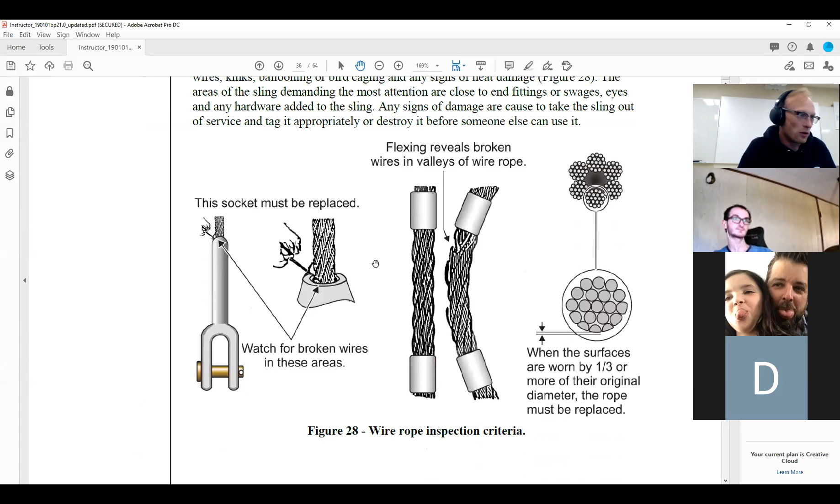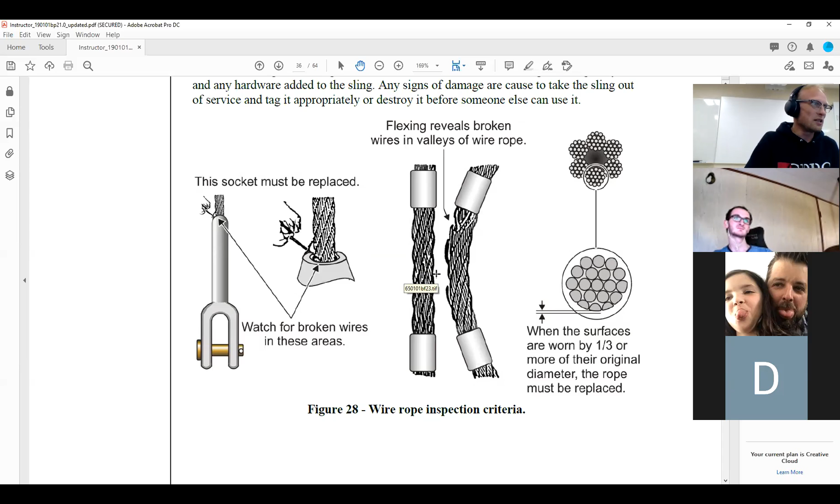This is the type of damage you're going to look for in your wire rope or wire sling. If you grab a wire sling to use it and you stab yourself, look and see how many of these wires are damaged. If it's poking you in the hand - and I'm sure if any of you have played with a winch and rewound a winch cable, you've been poked with cable before - you know to take a look and see how much damage there is inside of it.

Chain slings as well need to be inspected. So here's what he's talking about with visual inspection: you measure a brand new chain, then measure an old one, and compare the lengths. From the manufacturer, they're going to give you wear and damage specifications. The reason they put their tag on here is because they're on the hook for that - if you follow their instructions, you should be okay. They guarantee that as long as you're following all the instructions they put out, including the wear and damage specifications, you'll be okay. So it's up to the manufacturer to designate those for each of their components.

For instance, this chain would have that tag with the manufacturer and a part number on it, and you'd be able to look it up. This chain, brand new, should be this long. Each link is going to be able to have this amount of damage to it, this amount of wear, and so on and so forth.

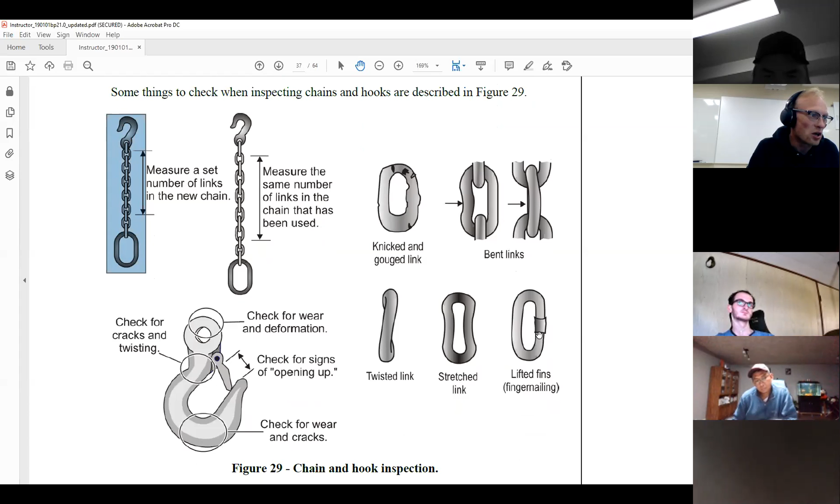Some of the things you can easily see with your visual inspection: nicked or gouged links of chain coming out, bent or twisted links, stretched links, or fingernailing where you have little fins coming off. This is where the chain was put together and it's starting to peel apart.

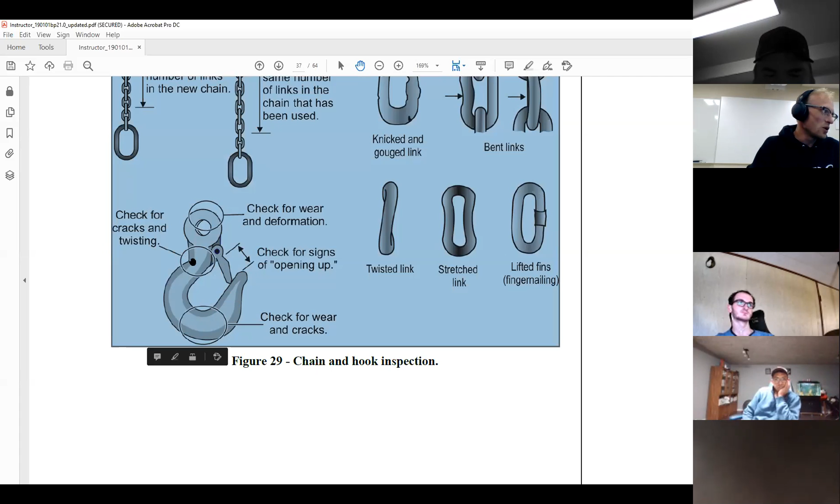And then on the hooks, you're gonna have to check, and this goes for cranes too. If any of you are doing a crane inspection, chances are you've inspected these hooks before. You're checking for cracks and wear. There's actually a manufacturer's specification for this gap here, twisting, cracks, and any out-of-round deformation or wear inside of this bore.

So we're about halfway through everything. Anybody have any questions about anything? Climbing equipment, lifting up loads, or some of the basic rigging equipment?

What if the tags fall off or break off or whatever? Yeah, it's supposed to, unless it can be certified again, and those tags, as far as I know, you shouldn't be reattaching them. If it comes off, it's garbage.

A lot of those chain slings can be sent away to the manufacturer and they'll fix them. When we were buying them in Edmonton, there was a company that made them, I can't remember their name, but if you'd inspect it and say it's out of spec, you'd send it back to them and they'd refurbish it. I don't know how they did it, but that was their thing, and it would come back with a shiny new tag on it, ready to go, and you could be assured it was safe.

I've seen people get away with using load slings that you tie down loads with, but you still really shouldn't use them. Or if an inspector saw them and remembered to check, you're pretty much screwed.

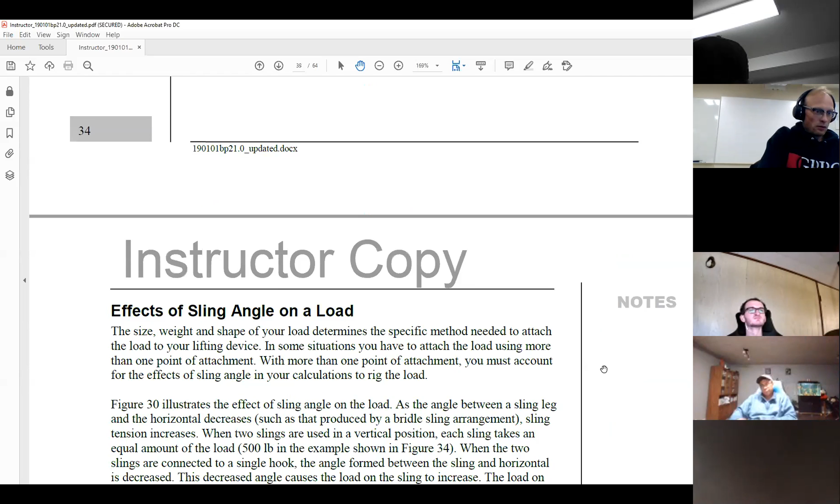Yeah, there's very little wiggle room to argue about this stuff. It's either you got the tag or you don't. You're using it or you're not.

That's pretty much it when it comes to safety. And I'll talk about a lot of this too, more in our course, subjectivity and objectivity, especially when we get into CVIPs. Or is that your bread and butter at a shop that does CVIPs?

Yep, yeah. So what we used to have is a lot of subjectivity. So I feel that this brake shoe fails. Well, why? Well, it's separating. Well, how much is it separating? Well, it's enough that I think it's separated. That is subjective. So I might say it's separating, Clint might say it's okay, because he's seen them way more separated than that and they're still fine.

So that's subjective. Now, since 2016, they published a new CVIP manual, and now they've made it a lot more objective. So for instance, with brake shoes being separated, the lining separating from the shoe, now you have to have a certain thickness separated to a certain depth, and that is how it fails.

And that is objective. That means it doesn't matter how Clint feels about it. Did that feeler gauge go in far enough? Yeah, then it failed, right? Or it didn't, well then it passed. There is no 'I feel it did' or 'I think it might be okay.' It's very objective.

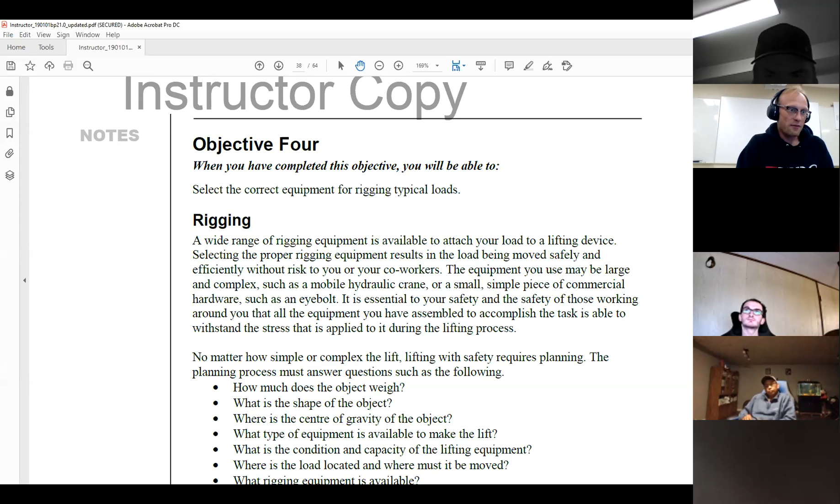Okay, so what we're going to do, we have 2 more objectives left. I'm not going to go through them anymore.